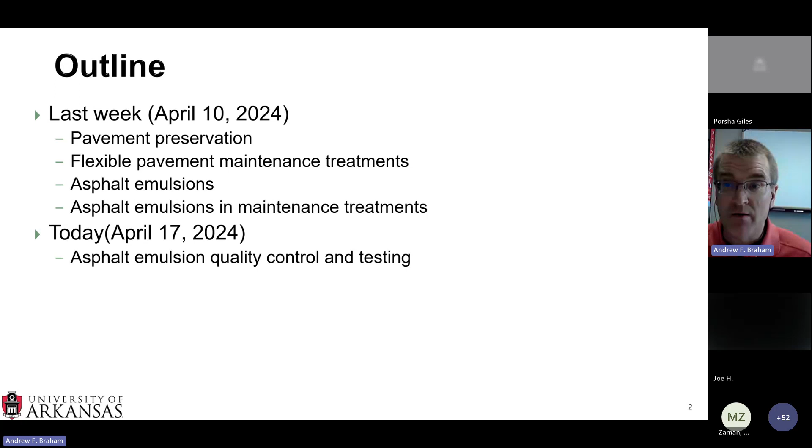Now this week, we're going to pivot a little more toward some of the details behind asphalt emulsions specifically, including quality control and testing of asphalt emulsions, specification best practices for asphalt emulsion maintenance treatments, and finally inspecting construction of asphalt emulsion treatments.

I often say that we can have the best materials in the world, we can have the best design in the world, but if we don't construct it correctly, if we don't make sure we have high quality materials, if we don't follow best practices, and if we don't inspect the construction correctly, all of the work we did up to that point is essentially irrelevant, and you will not get the full benefit of what you are trying to do on the roadway.

So today we're going to go over those three areas. Let's continue with asphalt emulsions in flexible pavement preservation.

Just a little bit of a recap. I wanted to make sure everyone's on the same page of Asphalt Emulsions 101, and specifically the nomenclature, or how asphalt emulsions are named, because we're going to go over a lot of examples and details where this nomenclature is important today.

For setting speed, there are 4 different setting speeds. We have the rapid set, quick set, medium set, and slow set, designated by R, Q, M, and S. There are also 3 different particle charges.

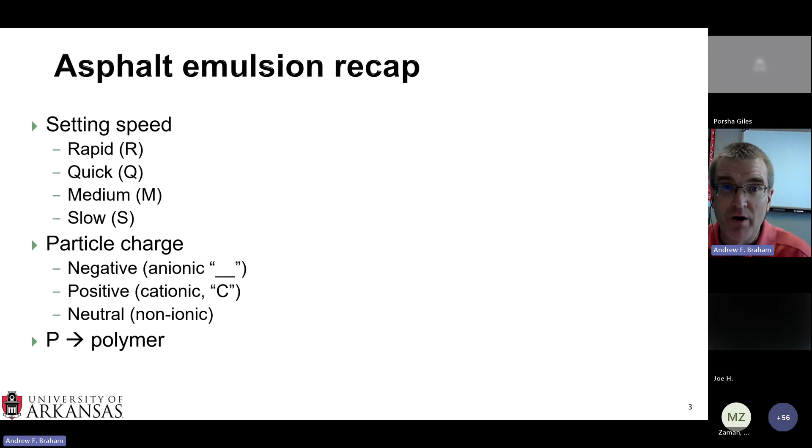Another very important letter is a capital P, which is polymer. I went over this in more detail last week, and Olivia posted the recording of part 1 of the workshop in the chat box, so I encourage you to take a look at that. Preferably not while I'm talking now, but if you want a quick recap, you could put that on double speed and try to catch up. But the link is there for you to watch at your leisure.

Now, what I wanted to do, and why I went over these definitions again, is—oh, I'm sorry, my screen stopped sharing for some reason. There we go.

The reason I wanted to go over these definitions quickly is because I want to spend some time talking about standards, specifically the 3 different types of standards that revolve around asphalt emulsions, including AASHTO M316, which covers polymer modified asphalt emulsions, with 11 different grades of asphalt emulsions within that specification.

Olivia, I apologize, my sharing ability is going on and off quite frequently. Am I doing something wrong on my end? Katie, could you see what is going on? I'll see what I can do. Okay, thank you, thank you.

So if we take a look at AASHTO M316, that is polymer modified asphalt emulsions, and there are 11 grades of asphalt emulsion covered under AASHTO M316. If you take a look at AASHTO M208, those are all the cationic asphalt emulsions, with 12 different grades covered under that standard. You may wonder why I'm going in reverse order—we started at M316, went to M208, and the last one I wanted to highlight was AASHTO M140.

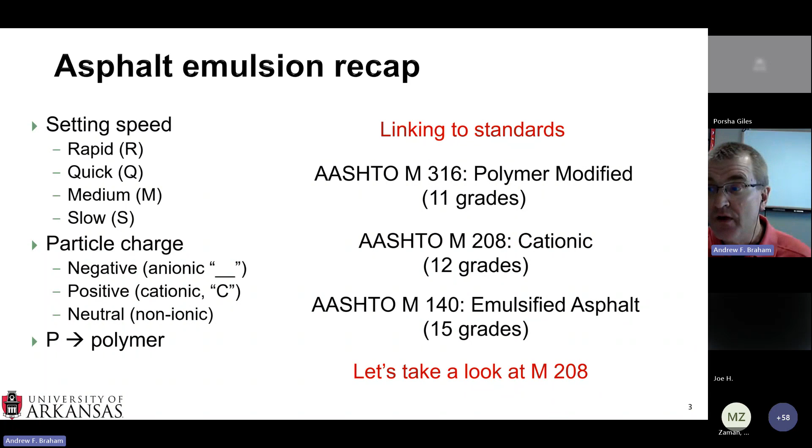Now, just so you know what you're getting into, we're going to take a quick look at M208. A big part of both 208, 316, and 140 are these massive tables, and along the left-hand column of these tables, you have the different tests that you can run on asphalt emulsions.

So you have a couple different viscosity tests—both Saybolt Furol and rotational paddle viscosity. You have a storage stability test, a particle charge test, a sieve test, and for AASHTO M208, a cement mixing test. Then we have what's called distillation, where you take your asphalt emulsion, and historically you get an asphalt emulsion residue out of it.

Sorry, Andrew. Katie, could you mute other people because I can hear background noise. Thank you.

So this top half of tests are tests on the emulsified asphalt, but then you need to get what's called asphalt emulsion residue. The traditional method of obtaining that asphalt emulsion residue is through the distillation test. You get your residue in a percent, and then you also get something called oil distillation, which are lighter fractions of your asphalt binder that come off the top.

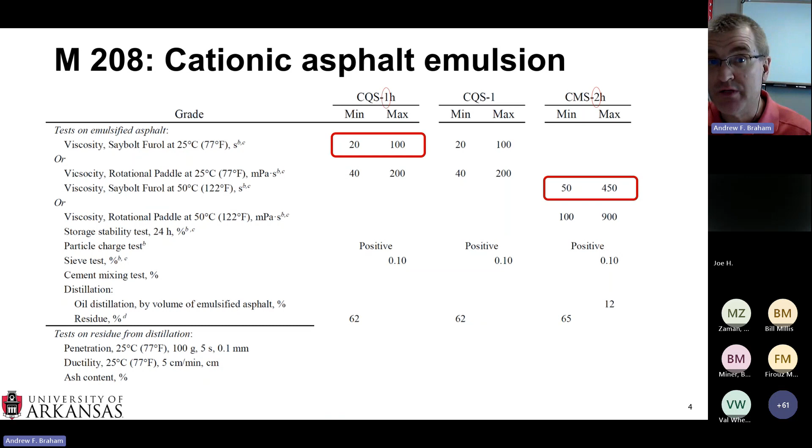Then you've got some distillation. That CMS-2H has a 12% maximum oil distillation, but you can see the residues vary between these different emulsions. The CQSs both have a 62% residue. That means it's 62% asphalt binder, and then that would mean 38% liquids that evaporate off during the distillation test. And then the CMS is a 65% residue.

Then getting down on the tests on the residue, we've got our standard friend, the penetration test. You can see that CQS-1 does not have any letter after the 1, but the CMS-2H has the H, and the penetration result is what causes the differentiation between having an H and not having an H. Not having that H means the penetration's between 90 and 250—that's a little softer, the needle goes down into the asphalt emulsion residue a little more. And then the 2H, that's a hard pen asphalt binder, that's between 40 and 90.

So this is just, again, an example. As I mentioned, there are 12 total cationic grades, 11 polymer modified, and 15 emulsified asphalts. So there's a whole bunch of these different ones, but this is how you actually take a sample of asphalt emulsion and make sure it's passing and has the properties you're interested in it having.

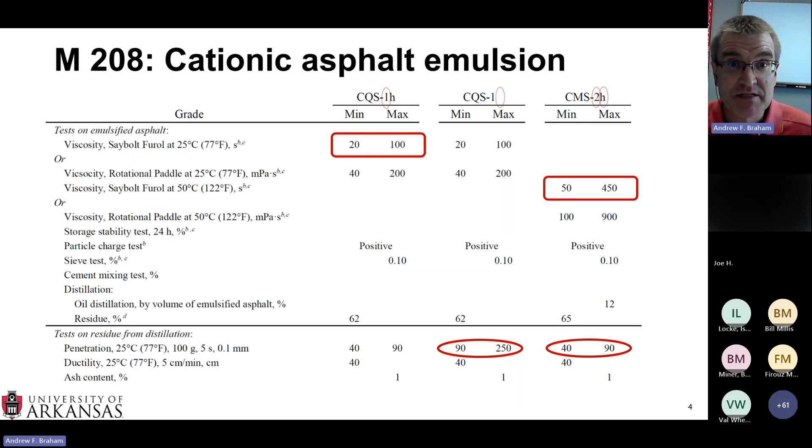Now, I went over this table relatively quickly. If you have access to AASHTO standards, I recommend you take a look at these tables. They're very interesting to look at, there's a lot of nice details behind there. But I did want to go over some of the tests, and some of the tests are shown in AASHTO T59.

So when we're looking at grading asphalt emulsions, we have M140, M208, and M316. But when we're looking at the actual tests that can be run, we're going to pivot to AASHTO T59. These are emulsified asphalt tests, and we're going to start with looking at the tests that are run on the asphalt emulsion.

They are broken down into various different categories. For example, they're broken down into the composition of the asphalt emulsion. You have water content, you have the residue and oil distillate, which is shown on the right. You have the residue by evaporation, and you have the particle charge. So in AASHTO T59, these are all considered composition properties of asphalt emulsion.

Now, another way to look at it is through consistency. So what are some tests that we can run to measure the consistency of asphalt emulsion? We're going to look at two different viscosity tests, the Saybolt and the paddle viscometer.

Now, I apologize in advance. I'm a civil engineer, I'm not an artist. All my artwork is done in Excel. So I'm going to try and demonstrate the Saybolt test, and you guys can judge as to whether or not you think you get the point across.

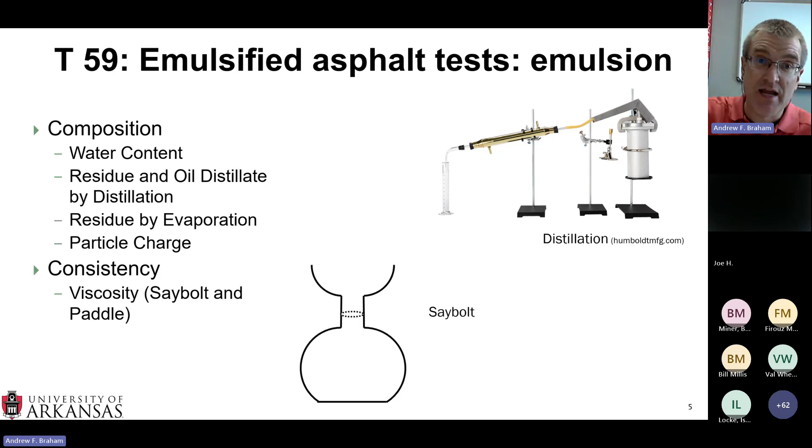But the whole point of the Saybolt test is you have some sort of container in a bath at a certain temperature that has a very specific hole at the bottom, and it's a Saybolt orifice. That's how the test gets its name. You take a cork out, and then the emulsion starts pouring into this little cup. So you take the cork out, you start your watch, asphalt emulsion falls down. You want to make sure it hits the side of that cup so it doesn't get really turbulent.

As it falls down, it starts filling the cup. And what you do is you measure the time from when you pull that cork out to when the asphalt emulsion reaches that dotted line. So how long does it take to fill that cup? And if you remember from the previous slide, the Saybolt viscosity is measured in seconds. So it's a time.

Now, the Saybolt viscosity is a relatively old test. We don't run a Brookfield rotational viscometer because, in theory, if you run the Brookfield rotational viscometer, it needs to be a homogeneous material, and asphalt emulsion, by definition, is not homogeneous. So we can also run the paddle viscometer, which is essentially where you have a cup, you place a paddle in, and then you start rotating the paddle, and you measure the resistance.

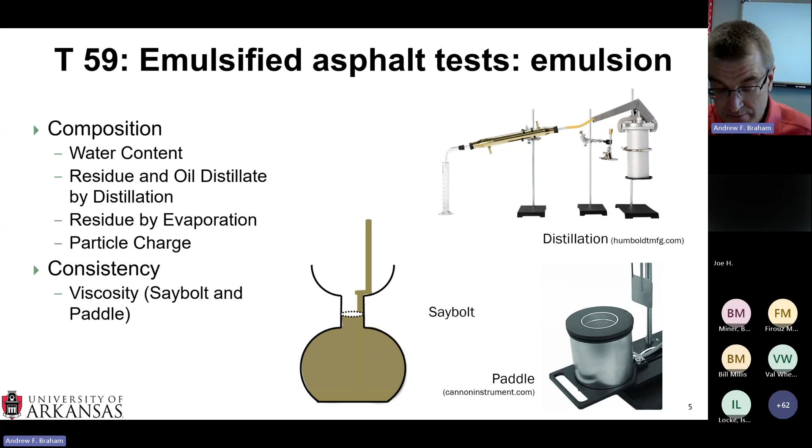So these are the first sets of tests on asphalt emulsion in T59. That includes composition and consistency. We can continue going through T59, and the next category is stability.

If you remember from the previous presentation, asphalt emulsion is asphalt binder droplets suspended in water with the help of emulsifiers, but over time asphalt emulsion flocculates, which means the particles start to come together, but you can separate them. It starts to coalesce, which means those droplets start sticking together and you can't separate them. And then the water eventually leaves the system, and that's a full break.

We're very interested in making sure that we can store the asphalt emulsions in a tank for a period of time before shipping them to the job site, so they need to be stable. One test is a demulsibility test, which is essentially where you drop some chemical into your emulsion and you stir it and you see how long it takes for the asphalt emulsion to start coalescing. How long does it take for those binder droplets to start joining together and your asphalt emulsion breaks?

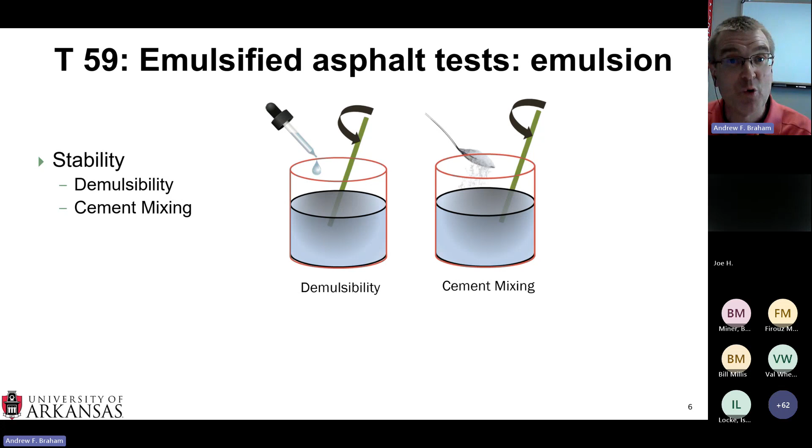So the demulsibility is a relatively newer test, but the old school way of doing this test is just to simply dump some cement in there. So you have a little bit of reactivity from the surface chemistry of the cement. You also have a very high surface area of the cement particles. So this is another way you can quantify the breaking characteristics of your asphalt emulsion, and you can measure how stable your asphalt emulsion is.

Now, I had mentioned the sieve test. You literally take your asphalt emulsion and you pour it through a screen. And you rinse that screen and you measure how many particles have been retained on that screen. These are very large particles. If you recall, 0.1% is the maximum for the sieve test, and that's because these are very oversized particles.

And these are not good for asphalt emulsions. They cause problems with pumping. They cause problems with spraying for chip seals or fog seals or scrub seals. And then they also cause problems for good mixing when you're doing slurry seals, microsurfacing, cold in place recycling, full depth reclamation, hot in place recycling, any sort of mixture test. So you want to have a low amount of sieve.

Then we also have the storage stability test. Essentially, you put your asphalt emulsion in a big graduated cylinder and let it sit. Over a 24-hour period, you measure how much of the asphalt binder droplets have sunk to the bottom, and how much of the water has risen to the top. The heavier particles drop due to gravity, while the lighter particles are more suspended at the top, so you can actually see a gradient of colors.

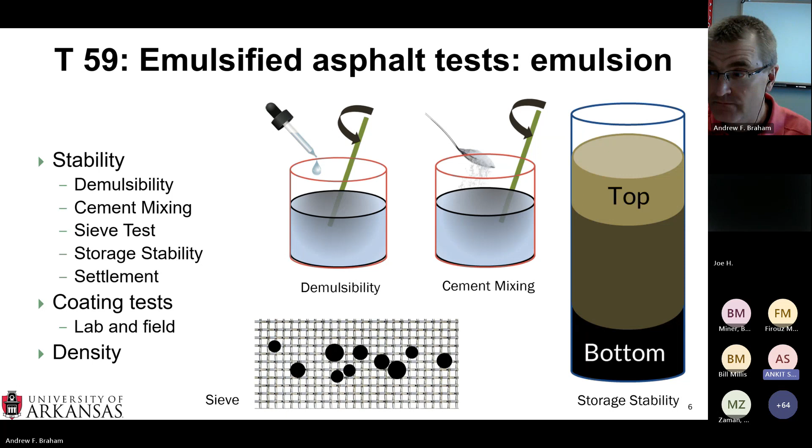For example, here in the state of Arkansas, in the southern United States, we use PG 64 minus 22 quite a bit. You go up to Wisconsin, which is where I'm originally from, and I love Wisconsin, they use a lot of PG 58 minus 28, which is a much softer binder. So the idea is, whether you're in Wisconsin or Arkansas, it doesn't matter what the base binder is. Your job, when making emulsions, is if you want to make a CQS-1H, you need to put the proper ingredients together to hit all those numbers. If you want to make a CMS2H, you might need to tweak this or that.

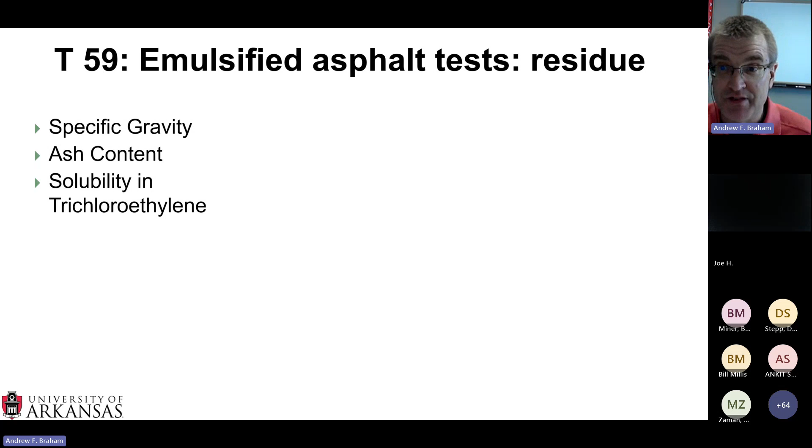So we spent a little time on AASHTO T59 talking about the asphalt emulsion tests. Now AASHTO T59 also has some tests for the residue, the asphalt emulsion residue. So we have specific gravity, ash content, which is how much non-combustible material is in your asphalt emulsion residue, and we have solubility as a test.

Then we have the classic penetration test, and I always like talking about this test for two reasons. One, it's probably the most historic asphalt binder test we have in our toolbox. Two, this is literally a sewing needle used in the penetration test. The gentleman who created it was looking for something to poke into an asphalt binder sample, so he went to his wife's sewing kit, took a sewing needle out, put a 100-gram weight on it, and measured how long it takes for that sewing needle to sink into the asphalt binder sample, how far it sinks in 5 seconds with that 100-gram weight on it. So it's a classic test.

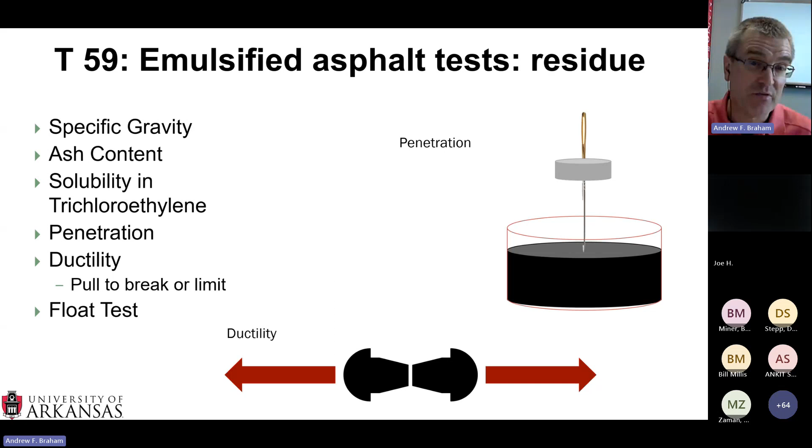Now we also have ductility. Ductility is where you take your sample and start pulling it apart until it breaks, or you reach the limit of the test. That's the ductility, basically how stretchy the asphalt emulsion residue is. And then the float test. The float test has to do with high float asphalt emulsions, which are a very special category. Again, it doesn't matter how you make it, but if you run the float test on the asphalt emulsion and it passes, then you have a high float asphalt emulsion.

Now these are all AASHTO T59. When we're talking about specifications, a lot of state and local specifications do have a lot of the AASHTO T59 tests in their specification. But I wanted to give a call out to some more tests that are out there and available.

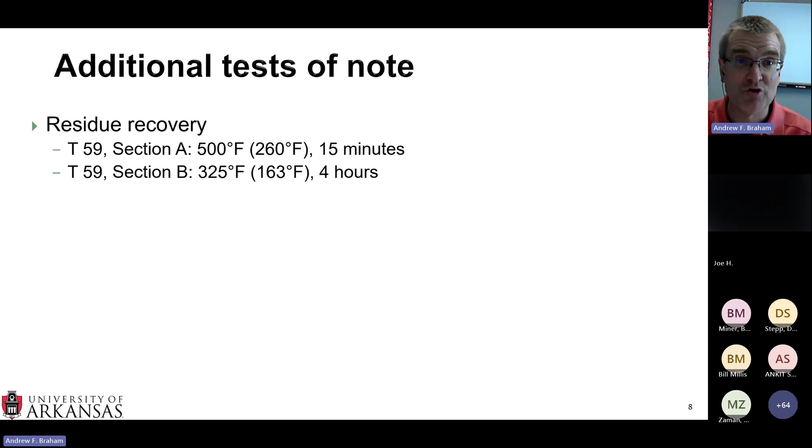For example, the residue recovery. When you're running the distillation test, that's the classic test to get asphalt emulsion residue, at about 500 degrees Fahrenheit, which is an extremely high temperature not seen in the field and not representative of how asphalt emulsion loses its water, how it breaks and loses water in the field. So we have AASHTO T59, which includes different alternative residue recovery methods with slightly lower temperatures, so you don't heat your asphalt emulsion residue up as high as is necessary for the distillation test. We have section A and section B, with lower temperatures and longer times to get your residue, so there are pros and cons to that.

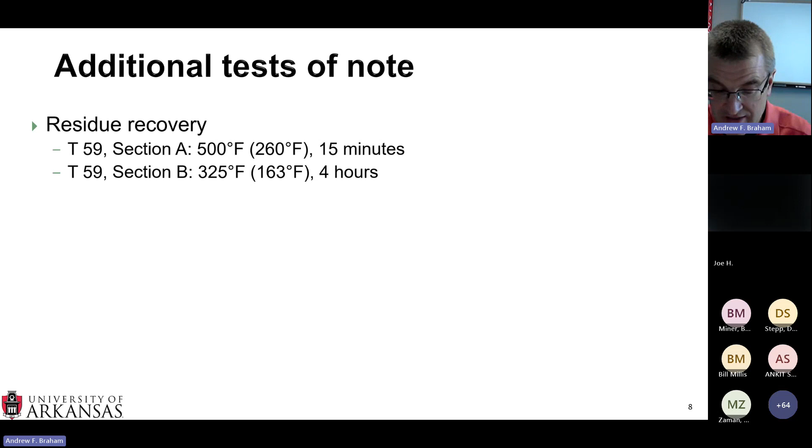Then in R78, we again have procedure A and B, and these are even lower temperatures. So the default distillation temperature, AASHTO T59 section A, is 500 degrees Fahrenheit and only takes 15 minutes, which is fantastic. But these more ambient, more representative temperatures you see in the field, AASHTO R78 procedure A and B, take much longer: 24 hours at 77 degrees Fahrenheit plus 24 hours at 140 degrees Fahrenheit, or just 6 hours at 140 degrees Fahrenheit at a thinner layer.

If you're interested in this residue recovery, Mike Anderson at the Asphalt Institute has been doing a fantastic job in NCHRP 9-63. He's building on work done by Dr. Amy Epps Martin at Texas A&M and Dr. Richard Kim at NC State, who've done a lot of work in this area. I encourage you to take a look at NCHRP 9-63, and hopefully we'll be getting some of those final reports in the upcoming months.

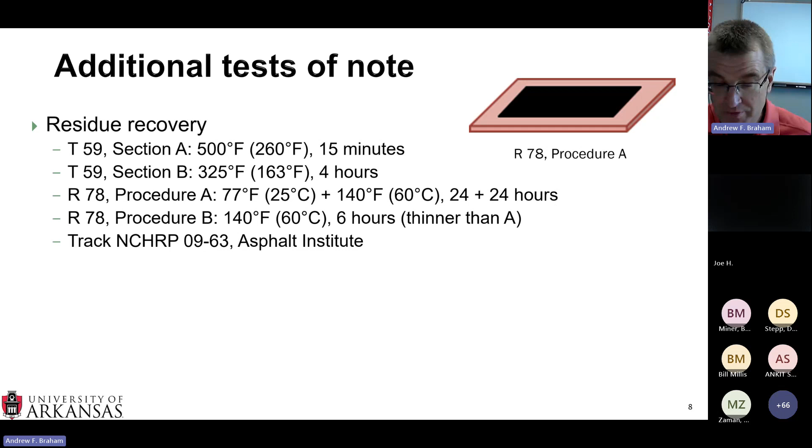We also have elastic recovery. So if you remember, ductility is where you pull your sample and it either breaks or it pulls to the limit. Elastic recovery is where you pull to a certain limit, then cut it, and see how much the sample rebounds. This is very important when we're talking about polymer, because polymer has that rebounding action. There are other additives that can simulate polymer in a lot of ways, but they will not be able to pass the elastic recovery test.

So AASHTO M316 explicitly states elastic recovery to ensure that you're putting polymer in. This can be an SBS modified asphalt binder base, or it can be a latex modified asphalt emulsion. The softening point is also included in this test. These are some additional tests that are in the different AASHTO M140, M208, and M316. I think there'll be a lot of information about this residue recovery coming up in the upcoming year, because that's a point of very large interest.

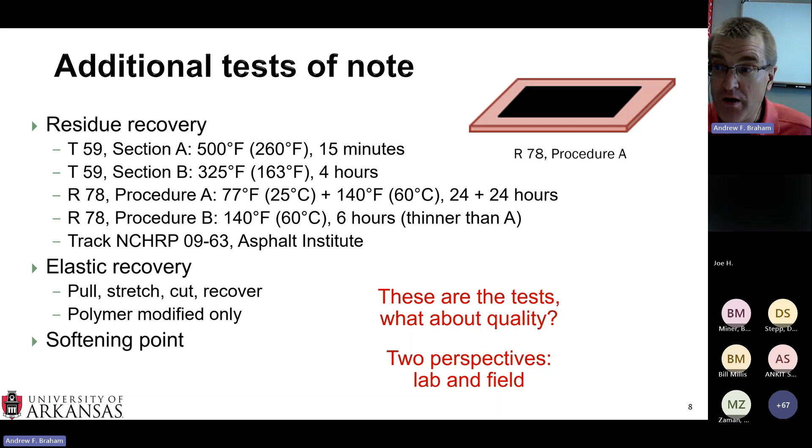So these are the tests, and the title of this section was Quality Control and Testing. We went over the tests. Now, how do we start trying to wrap our heads around quality control? This is something I've actually gotten very interested in over the past 5 to 7 years. I think that the concept of quality is not quite as appreciated as much as it could be. So we're going to look at 2 perspectives for quality: the lab perspective and then a field perspective.

So the lab perspective of quality is everything AASHTO R18. AASHTO R18 essentially helps you build a quality management system, and they start you right at step 1. They have 8 management areas, and this includes making sure you're tracking documents, mapping out your organization, establishing the proper staff. You really should have a quality manager, someone who is in charge of the quality perspective. It goes over what sort of technicians you need and how you train those technicians.

And then how do you evaluate it? Because when you think about it, you've got different people running these tests, and Dr. Zaman asked how repeatable they are. Well, if the technicians have proper training and are properly evaluated, in theory, anyone running that test should be able to get a high quality, repeatable result. But like any test, if you're not running it correctly, you're going to get some poor results. It's important to have internal audits—a way to self-reflect and make sure you're doing everything correctly.

I really like this. It's not often that you get to pick on management, but there's a lot that needs to be done in the weeds on the tests at that level. But also you need to make sure management is 100% involved with this as well, because it does take extra resources—a little time, a little money—but if you're pushing out a consistent product, it becomes well worth it. You need to make sure there are mechanisms in place for any sort of corrective actions.

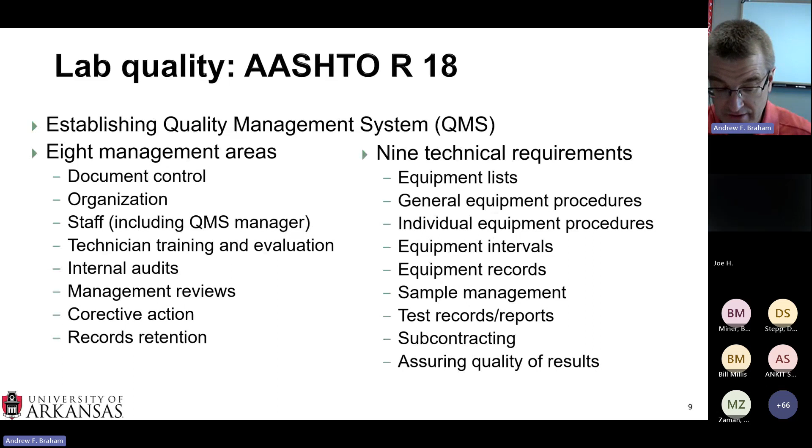So that's all in the lab, and now we can kind of pivot over to the field. When we're thinking about field quality, we're just going to look at an example of an asphalt emulsion. I'm going to have 3 columns here: the first column is the process control test - what kind of tests can you actually run in order to quantify the quality of emulsion in the field?

We're going to talk about specific test measures that can capture that process, and then we're going to talk about the frequency.

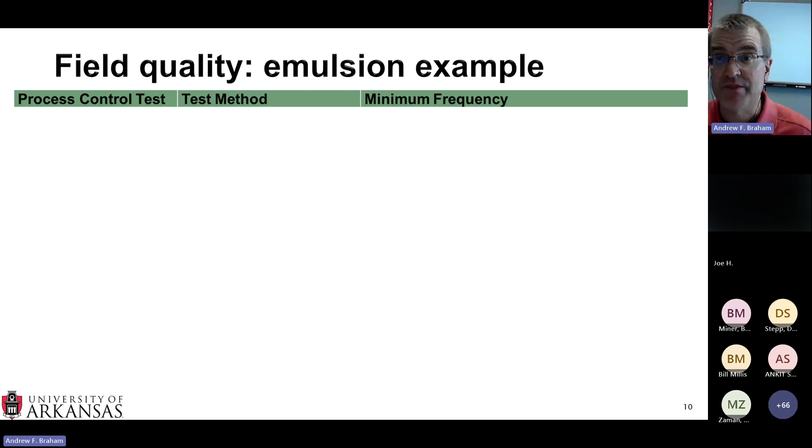For example, viscosity - you can use either AASHTO T59 or T382. T382 is the paddle viscometer. According to this example, you want to run viscosity once per every 48,000 gallons of emulsion placed. If you're looking at a half gallon per square yard or something like that, that's about 100,000 square yards. So every 100,000 square yards of coverage, if this is a chip seal, you would run a viscosity test.

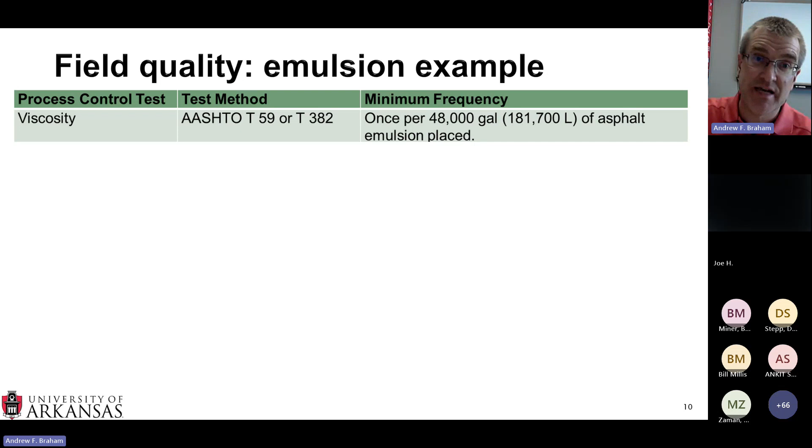And that allows you to test material as you're placing it on a regular basis as you go down the road.

You want to make sure that your emulsion's at the right temperature, and so every time a new tanker comes with a new batch of asphalt emulsion, you want to check that temperature. You want to check particle charge and demulsibility. For particle charge, it's recommended to check it once prior to loading the emulsion distributor, and for demulsibility, it's the same as viscosity, once per 48,000 gallons.

All three of these - sieve, storage stability, and residue - these are also once every 48,000 gallons. And then the application rate: this is what's actually being placed down in the field. You want to make sure that you're properly capturing how much material is actually being placed on the roadway, once at startup each production day, and then every 48,000 gallons.

So these are from one of the quality assurance documents that the AASHTO Emulsion Task Force has developed. This is just one example of a group of experts who came together and said, these are the important tests that we need to run to make sure the material we're placing in the field is representative, and this is how often we think they should be run. These are interesting numbers because they actually put some data behind how you can track to make sure your emulsion is doing what it needs to do in the field.

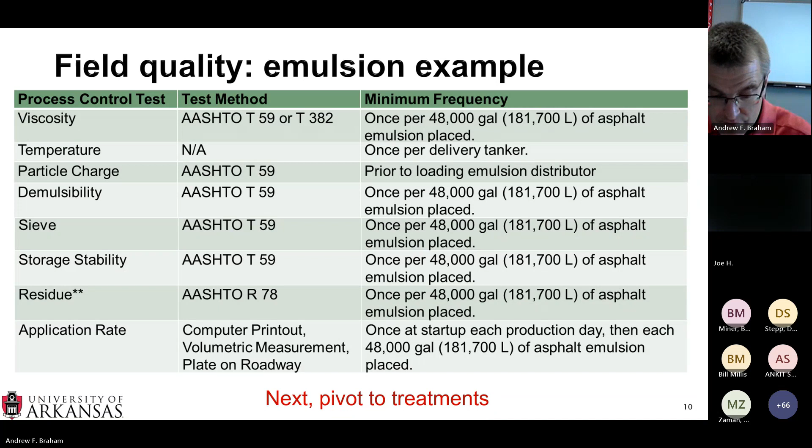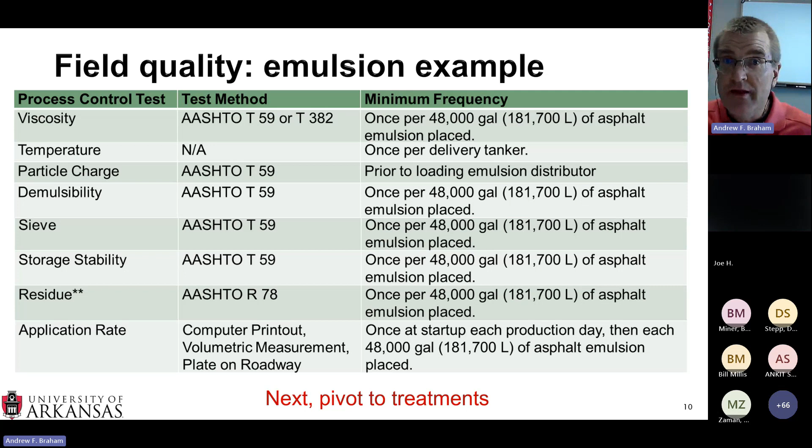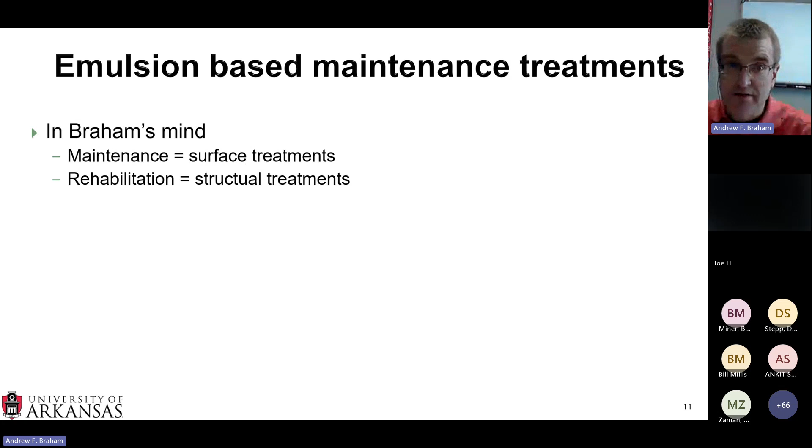If you joined us last week, this is kind of my mindset. I'm a little unique in many ways, but when I think about maintenance treatments for flexible pavements, I think of just taking care of the surface. When I think about rehabilitation treatments, I think about taking care of the structure. So this is kind of how I delineate maintenance versus rehabilitation for flexible pavements in my mind.

Some of the maintenance treatments: we've got fog seal, both standard fog seals and rejuvenated fog seals. We have chip seals, sand seals, and scrub seals. These all involve placing some sort of aggregate on top of sprayed asphalt emulsion. We have slurry surfacing, which is a combination of slurry seal and microsurfacing. And then we have ultra thin bonded wearing courses, and combination treatments.

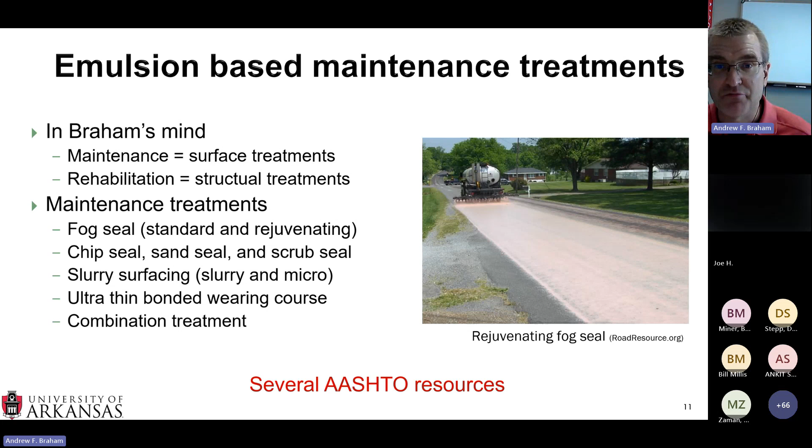Now, there are several AASHTO resources. I don't have this written down, but I want to give a shout out to roadresource.org. If you have not been there, I encourage you to go there. They have a very good overview of all of these treatments, and you can go there free of charge, click on whatever you want and check it out.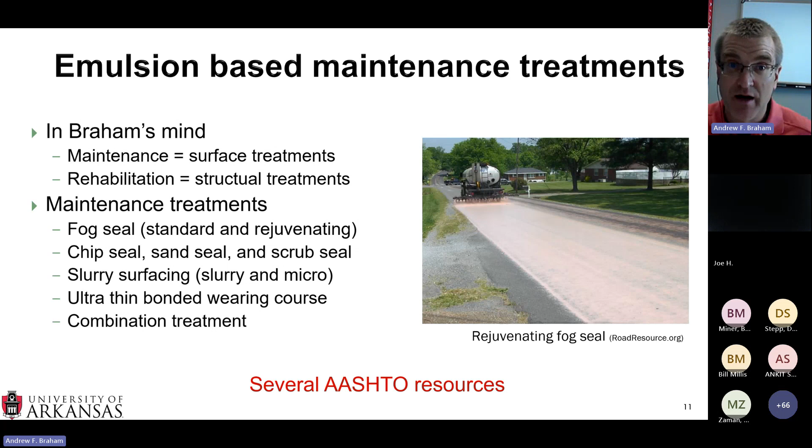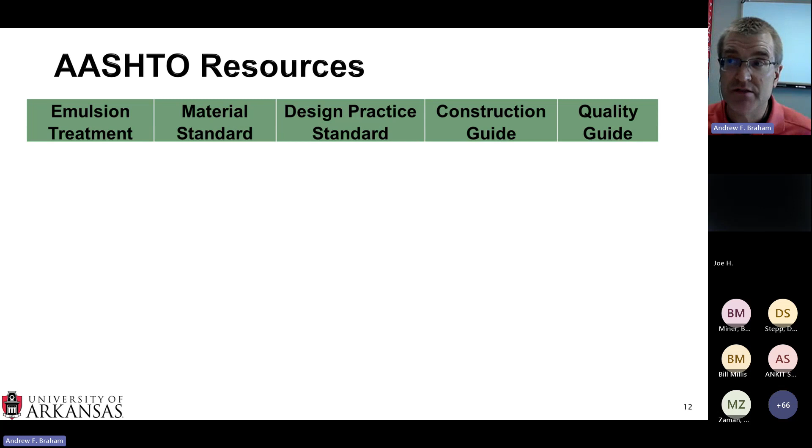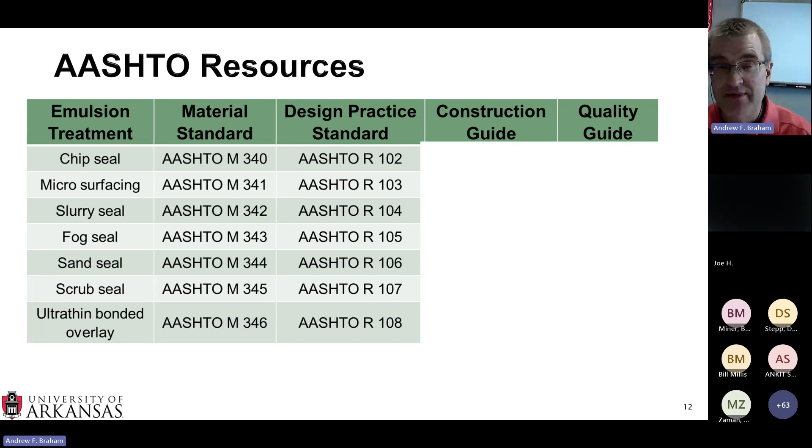But AASHTO has also done a tremendous job of developing resources for these treatments. The AASHTO resources include material standards, design practice standards, construction guides, and quality guides. These have been developed for chip seals, microsurfacing, slurry seals and fog seals, sand seals and scrub seals, and ultra-thin bonded overlays. If you have access to AASHTO standards, these are the actual material standards, going from M340 to M346. The design practice standards go from R102 to R108 for all of these treatments. There is an incredible amount of information in both the material standards and the design practice standards.

And Rama asked if there are free online resources, and good news, there are free online resources for these, which we'll get to in a second.

The construction guides are also being developed. Now, the construction guides themselves are not available free for download, but you can download the research reports that developed them. In theory, all the information that's in the construction guides is in the research report—there's a lot more in there, but the research report has all the information. So if you Google NCHRP 14-37, NCHRP 14-44, or NCHRP 14-48, I think you can download the 37 and 44 final reports, and the 48 final report should be coming out shortly. That project just finished up.

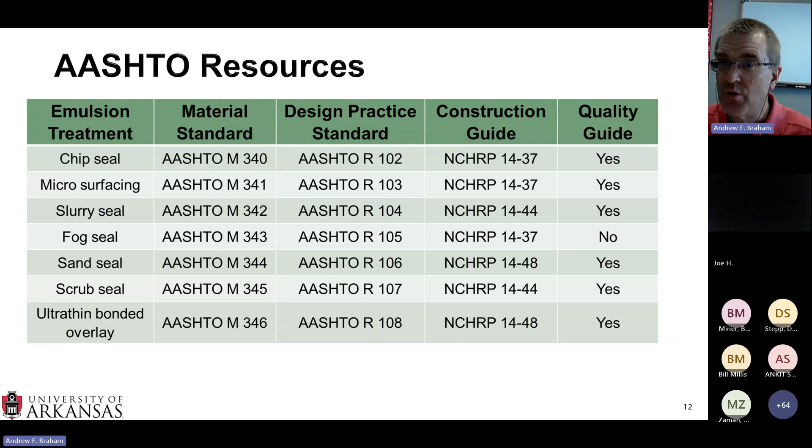And then you can see there are also quality guides for all but the fog seals. As you're Googling, you can also Google Emulsion Task Force. If you go to their webpage and click on specifications, there are draft documents of these available online free of charge.

I'm actually going to go over some of these draft documents, so I apologize in advance because they have watermarks on them, but you can download these and still read them. It's a little clunky, and there are a couple small changes between the draft documents and the final approved standards, but they're all here available for you to take a look at.

So let's take a look at chip seals. Chip seal is by far the most common maintenance treatment that's applied to our roadways.

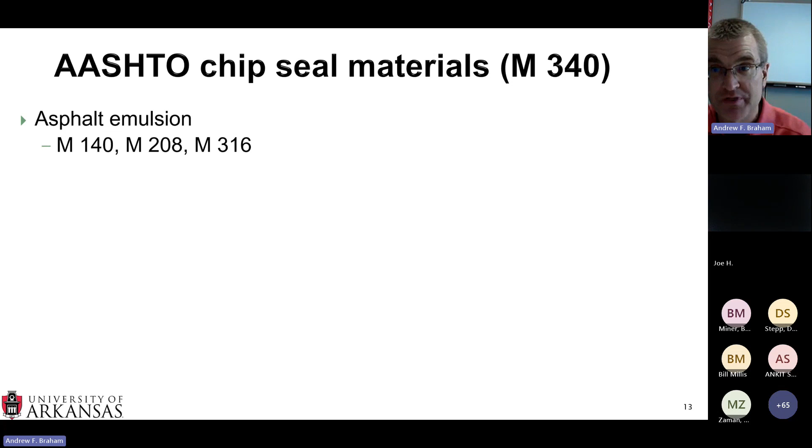If you look at AASHTO M340, there are 3 different asphalt emulsion standards that need to be followed, whether you're using a standard emulsified asphalt, that's M140, a cationic asphalt emulsion, M208, or a polymer modified asphalt emulsion, M316. We have 4 different gradations, labeled A, B, C, and D.

And you can see they have a maximum size of 3/4 inch, 1/2 inch, 3/8 inch, and 2 of them are 3/8 inch. But that D is much smaller than the C, it's a finer gradation. But these are the 4 gradations, and there's 2 things that I would like you to notice on all 4 of these gradations.

One is they're very single sized. So for example, if you look at A, almost all of the aggregate is between 3/8 inch and a 1/2 inch. If you look at B, almost all the aggregates are between the number 4 and a 3/8 inch, and it kind of steps down as you get higher in those letters. So single size aggregate are very important for chip seals.

And also, if you look at the dust, all of the dust is low. Dust is also the P200, and you can see it's between 0 and 1% for all but the D, which is between 0 and 3. So they're very, very clean aggregate gradations.

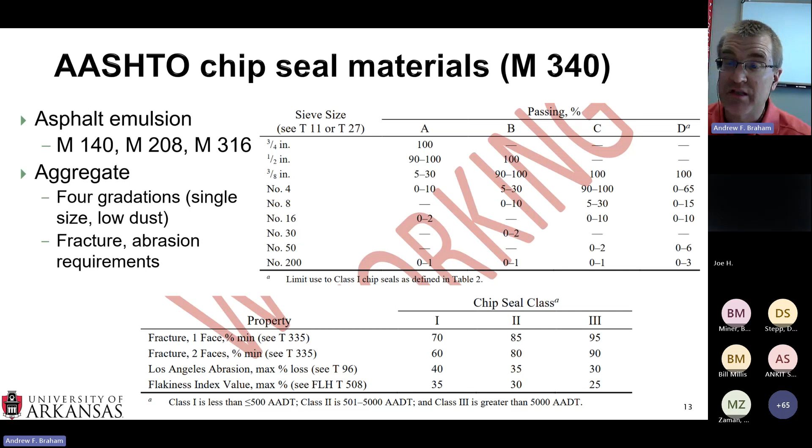And there's also other various aggregate properties: fractured faces, LA abrasion, flakiness index, these type of things. And you can see here they have different classes, and those classes are based on traffic volume. So I mentioned the chip seals are one of the highest used maintenance treatments for flexible pavements, and there's a lot of them that go down on low volume roads, so less than 500 AADT. But then you can see that chip seals can very successfully be placed on higher traffic roads as well, but the requirements change for fractured faces, LA abrasion, and flakiness index.

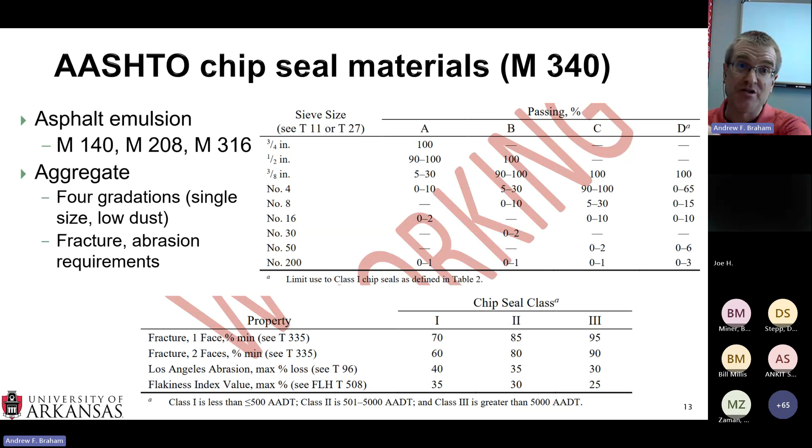Now, again, if you go to the Emulsion Task Force webpage, you can download the full working draft of the standard. I just took some screenshots, which is why that watermark is going across at an angle.

Now, for the design, that's R102. This is pretty exciting. For the aggregate, you use the board test for the spread rate. Basically, as the aggregate comes out of the chip spreader, how is it falling onto the pavement? What's the distribution of particles? What's the quantity of particles? You can simulate that with the board test. And so you run the board test and you get approximately the amount of aggregate that you should put down.

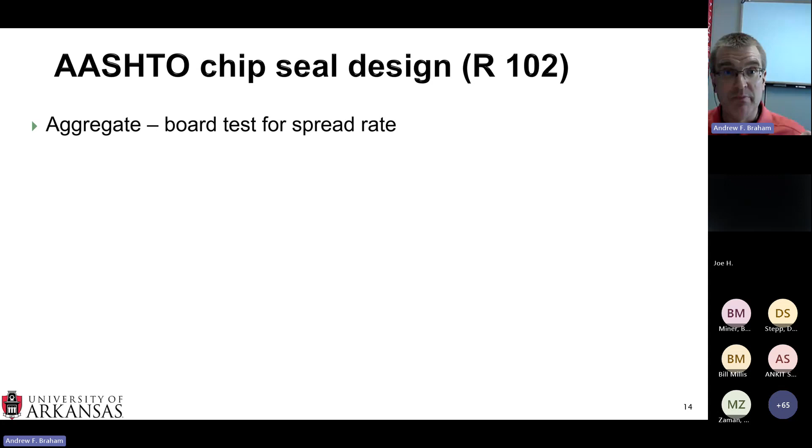And then Dr. Zaman said I wouldn't get paid for this if I didn't show an equation. So here's my equation, and this equation is the emulsified asphalt quantity. So you have your aggregate rate, and then you have your emulsion rate. You can see the emulsion rate is capital A, and the emulsion rate is a function of the embedment rate—so how much of those chips going down into the emulsion, the traffic, the existing surface, all of these different things. And you can see them all listed under that list of variables.

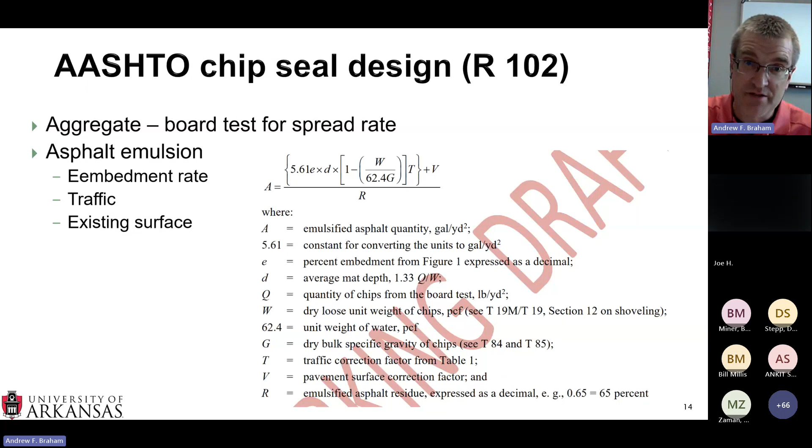And so once you know what your board test spread rate is, that is capital Q, you then find all those other values and you can get an approximate asphalt emulsion spray rate. Now, I do want to point out that there are conversions and adjustments that you can make if you have a very dry pavement, so high oxidation, high raveling, or a very flushed pavement with a lot of asphalt binder at the surface. You can adjust the shot rate a little up or down for chip seals. But this is kind of how you get your general shot rate based on the general aggregate, based on the general embedment that you're looking for, based on the general traffic in your general existing surface.

So that was the materials and the design. This is the construction guide overview. There's 7 sections in all of these construction guides. You have a description, and here you have a very nice description of the AASHTO construction guide overview. Basically, they're saying this is for chip seals, and this is what a chip seal is: application of emulsified asphalt, followed immediately by a single layer of aggregate chips to a prepared surface. So that's the description, and all of the construction guides have that at the beginning.

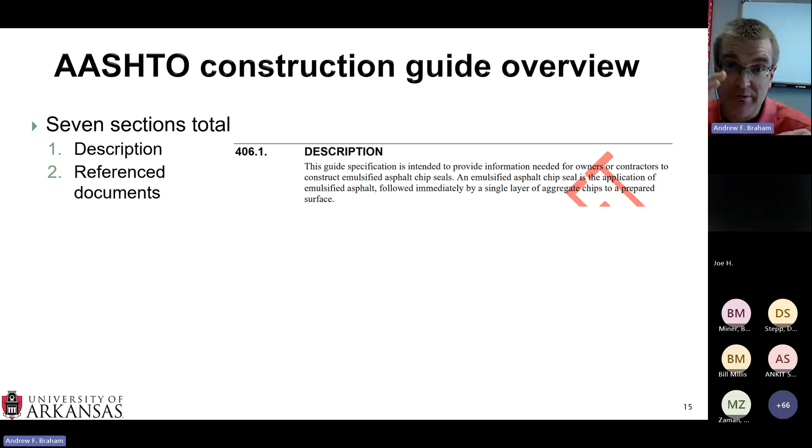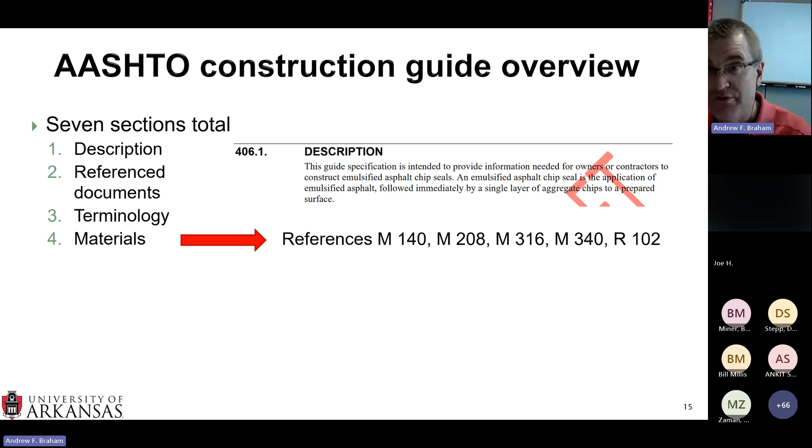Then you have some reference documents—what inside the construction guide actually references an external document. All of those have to be listed, basically the bibliography. You got some terms—if people aren't familiar with some terminology, they do define some terms, that's section 3. And then the materials are listed there. So for chip seals, it references the 3 emulsion standards: M140, M208, M316. And then also M340 and R102, that's the chip seal materials and the chip seal design. So this is all referencing these other resources that are already available.

I'm going to come back to construction. This is the construction guide overview. So that's the most important portion.

Then we have measurement and payment. Basically, this is how do you measure the emulsion and the aggregate, and then how do you pay for it? Usually payments are unit price or completed chip seal.

And a very key section here is construction. This is where the meat of the construction guide occurs.

Now we got a question here about how stress absorbing membrane interlayers are used in each of the surface treatments. Oh, that's a great question. First of all, thank you for asking. So a SAMI, my definition of a SAMI, is something that's put in between two flexible pavement layers.

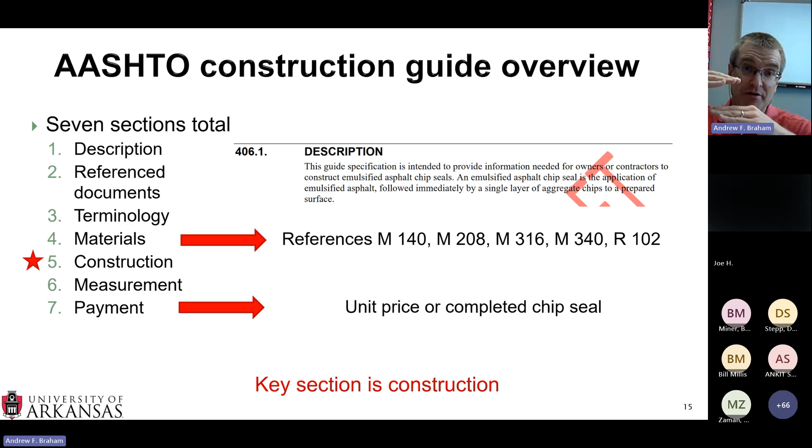In short, if you have a distress on that bottom layer, you don't want that distress to go up through into the top layer that you put on. So a SAMI is an interlayer, something you can put in between.

I usually tend to think that SAMIs are only used when you have two asphalt mixtures, one on top of another. Now, one of the SAMI materials can be a chip seal, but I'm not very familiar with SAMI being applied between an existing layer and a maintenance treatment. That's just my experience. But thank you for the question.

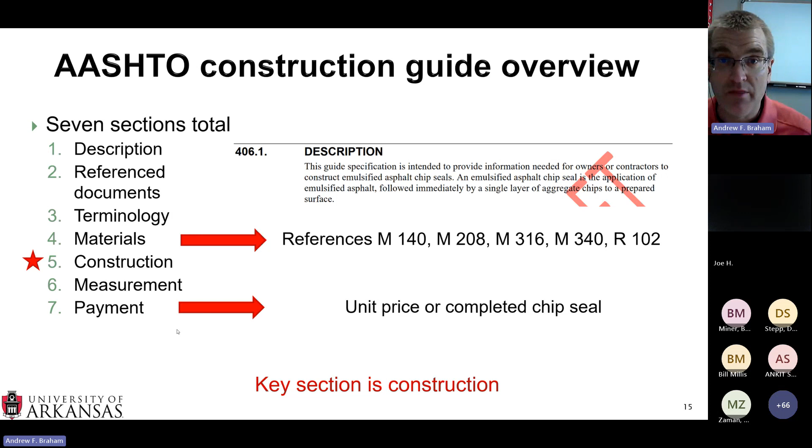I do appreciate that. So that's a little SAMI deviation, but I do want to dig a little into construction. These are the construction guides. By far the most, the meat of this document is in section 5, the construction section.

In section 5, we talk a lot about equipment. When you think about going out on a chip seal job, first of all, if you've never been on one, I highly encourage you to go out on one. Call your DOT. They all have chip seal crews, or they're placing chip seals somewhere, I guarantee you. And I bet they would be very happy to give you a tour of a chip seal job.

And when you get out there, you see an asphalt distributor. That's what sprays the asphalt emulsion. You see an aggregate spreader. That's what places the aggregate in that nice even layer as you're going down the road. You have a pneumatic tire roller.

So you do not compact a chip seal. You seat the aggregates for a chip seal, and you do that using a pneumatic tire roller. Then you have brooms to kick off excess rock. And then obviously you have trucks bringing new emulsion in, trucks bringing rocks in. So you've got a bunch of truck traffic too. All this type of traffic is covered under the equipment section of construction.

Now, I talked quite a bit about quality, right? I talked about quality in the lab and quality in the field. A huge part of quality is also equipment calibration. Folks, this is something that cannot be skipped, either in the lab or in the field.

If you have a piece of equipment, it will give you a number, or it will do something pretty much all the time. If it's not calibrated, though, it will not give you a number that's correct, or it will not perform as you're expecting it to.

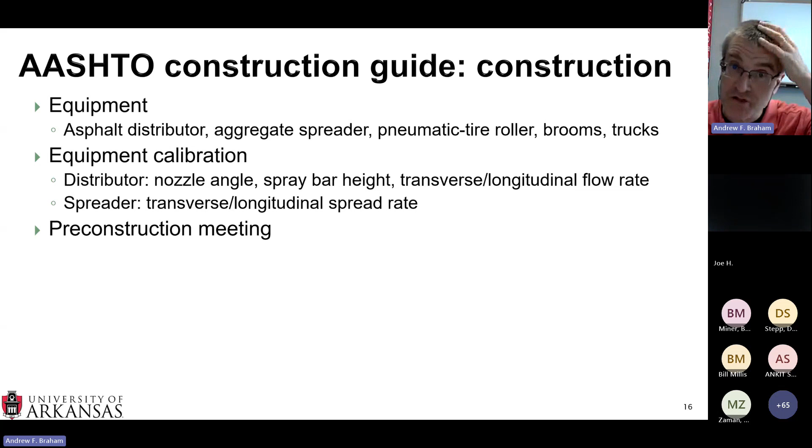Also, any safety considerations are discussed in the pre-construction meeting. And folks, I know I say a lot of things are important - I've probably said that like 15 times in this presentation - but I cannot emphasize enough the importance of properly preparing a road for a surface treatment.

If you don't believe me, the next time you need to put a Band-Aid on, like if you get a cut on your arm, go put some dirt on around the cut and then try to stick that Band-Aid on. The Band-Aid will adhere to the dirt and it'll come right off. It will not stick to your arm.

It's exactly the same thing with any sort of surface treatment. If you have a dirty road surface, your asphalt emulsion will stick to the dirt and come right off. And that's just horrible - you don't want that. So you want to clean the pavement.

You want to protect all the accessories - manhole covers, curbs, crosswalks, whatever you need to do. And you also want to remove stripes, because those thermoplastic stripes - sometimes you don't get good adhesion between emulsion and those type of materials. So you just want to micromill those things off.

And finally, during the application itself, some people think that in the construction guide, during construction, you only care about when you're applying the material. That's just one small part of the construction section of the construction guide. All this other stuff is also important.

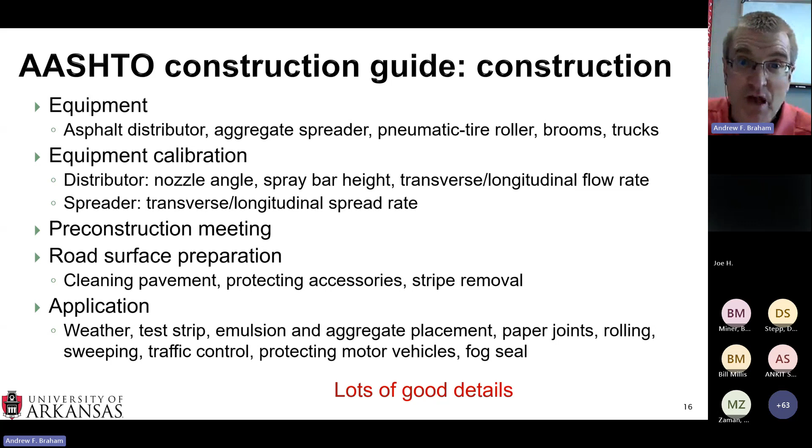The first question is: can we control the properties of an asphalt emulsion? 100%.

Asphalt emulsions are dependent on essentially three things: your base asphalt binder, the emulsifier you're using - that's the chemical - and any sort of water. Usually if you have potable water, you're fine, so you just use city water. But by changing the emulsifier, the quantity of the emulsifier, or the asphalt binder grade, you can change almost anything about any asphalt emulsion. That's a great question.

I encourage you, if you go to some emulsifier companies' websites - I'm not promoting any one single company, but there's four big ones: Nouryon, Ingevity, Arkema, and Kao - you can download product information sheets. So you can say, if you're doing a chip seal, we recommend these emulsifiers; if you're doing a slurry seal, we recommend these emulsifiers. You can match different emulsifiers to different treatments, and some of those websites even have the approximate dosage you can use.

Also, if it's a cationic emulsion, you can change how much acid you have or the type of acid. If it's an anionic emulsion, you can change how much base you have or the type of base - that can also impact it. So I think of it as a bunch of levers you can push and pull to change the asphalt emulsion properties, and you can absolutely make an emulsion that will degrade more quickly if you go into a zone you shouldn't go in. So that's a great question.

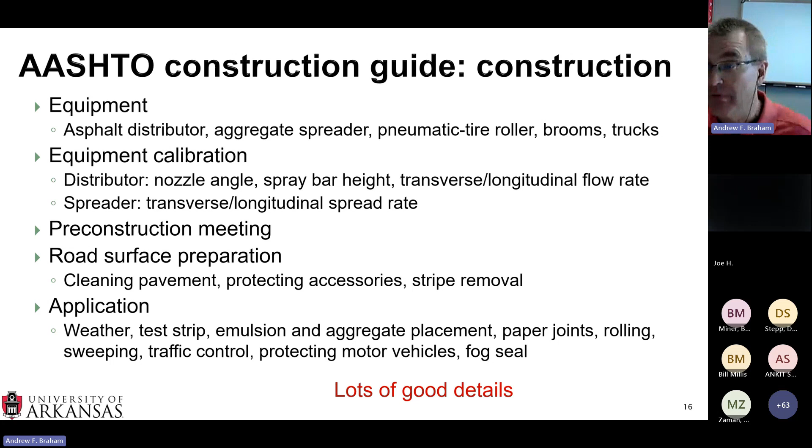We talked about the AASHTO chip seal materials, the chip seal design, the construction guide. Now this is the quality assurance guide. The quality assurance guides follow AASHTO R10 for the definitions, and this includes quality control (QC), agency acceptance, and independent assurance (IA).

For quality control, this usually revolves around what the contractor can do—what sort of personnel, labs and equipment you have, what activities you're performing, do you have a plan for the job, what records and documentation do you have, and are you complying with specifications? So this all kind of falls under the contractor's wheelhouse.

But then the agency or owner needs to accept this material, so they also have a set of tasks. They need to take care of sampling and testing, they may be in charge of traffic control, they want to make sure the surface preparation is being done correctly, that the equipment is calibrated, that you're putting down the right application rate, and you're inspecting the material that's going down. These are all things that have to be done on the owner side.

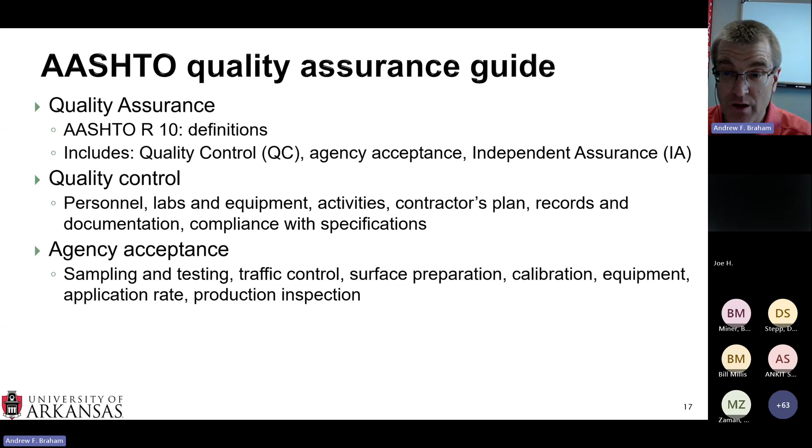So quality control tends to be under the contractor, the agency is the owner, and if they disagree with something, then the independent assurance comes in. This is basically an independent third party that gets triggered if there's an issue between the first two, intended to be an unbiased, independent evaluation.

If you want to learn more about it, I encourage you to download FHWA-HIF-12-001. That is everything you want to know about independent assurance, and there are a lot more good details in there.

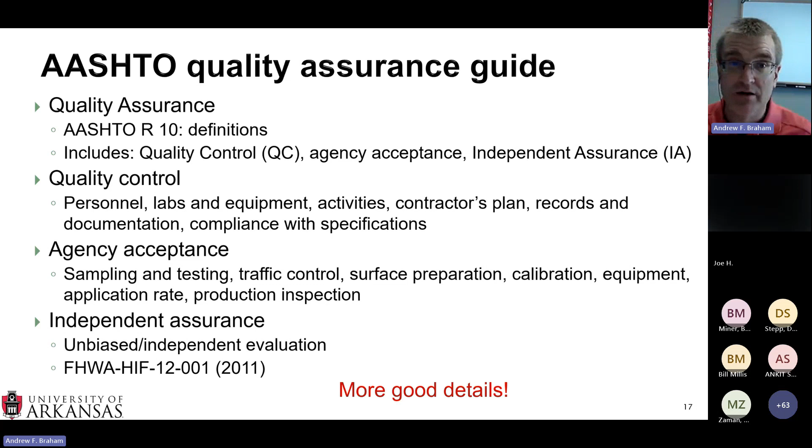Again, you can find draft quality guides on the Emulsion Task Force website. This is kind of the summary of the documents—I encourage you to try and get a hold of these. If you can't, then go to the Emulsion Task Force website, because I only had an hour and a half for this presentation and there are just a lot more things you could look into.

Now, before we get into inspection, the third part of this presentation, we do have a couple different questions. The first question is to discuss the factors between a cold mix asphalt and compare that to hot mix asphalt, specifically around the concept of stability.

It is my opinion that you can design and construct a cold mix asphalt pavement layer that meets the same requirements as a hot mix layer in almost any application. But again, it goes back to the proper materials, the proper design, and the proper construction. Now, my one caveat is surface courses, especially for high volume or fast moving traffic. I'm not 100% sold that cold mix asphalt can be used on, for example, interstate surfaces. I think the traffic may just be too abrasive for that, but there's a lot of lower volume roads out there for slower moving traffic where I think cold mix asphalt, if designed correctly with proper materials and constructed correctly, will have very similar performance to hot mix asphalt.

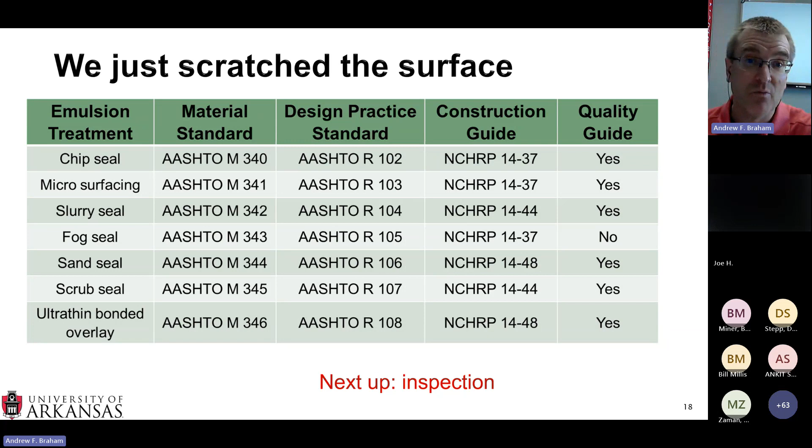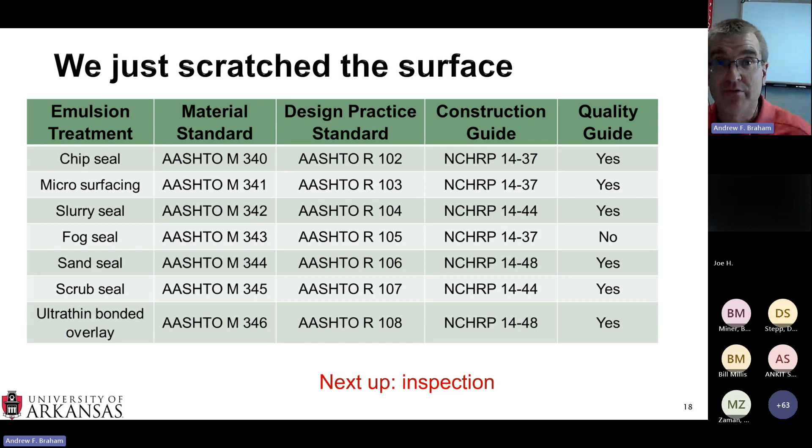Some great questions here, I really appreciate it. We've got 21 minutes left, and I'm glad people are asking questions during the presentation, because no one wants to listen to me talk for 75 minutes straight and then rush through 15 questions. But what I'm going to do is wrap up the rest of my content, because it's one more section, and then I'll finish off with questions for as long as people need.

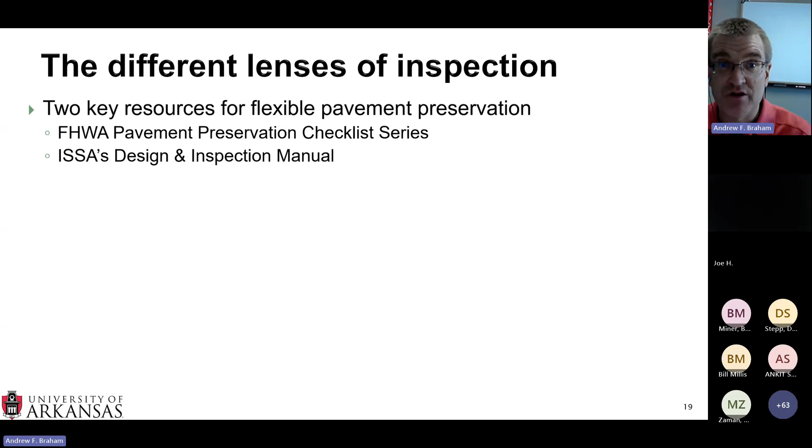When we talk about inspection, there are two different resources. The first is the FHWA Pavement Preservation Checklist Series. These are all free to download online, free of charge, available to anyone. Then there's the ISSA Design and Inspection Manual. If you search 2019 Pavement Preservation Checklists, those are all the flexible pavement treatments available to download for free. The ISSA Design and Inspection Manual for slurry seals and microsurfacing is free if you're an ISSA member. If you're a government agency, you get free ISSA memberships with your .gov email address, so if you work for a government you can get the Design and Inspection Manual free of charge.

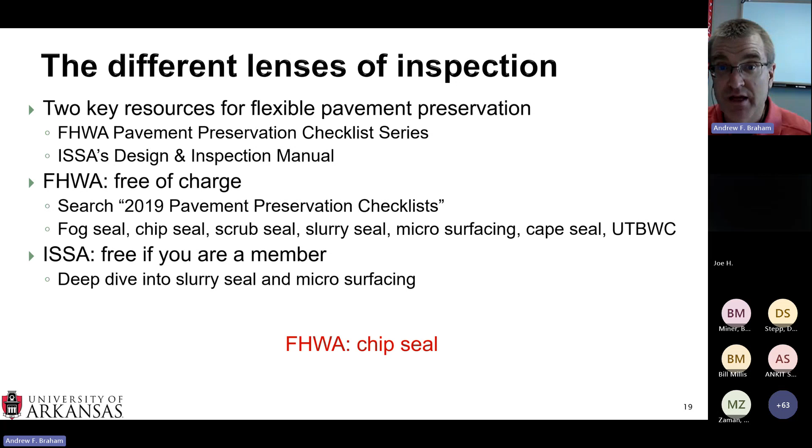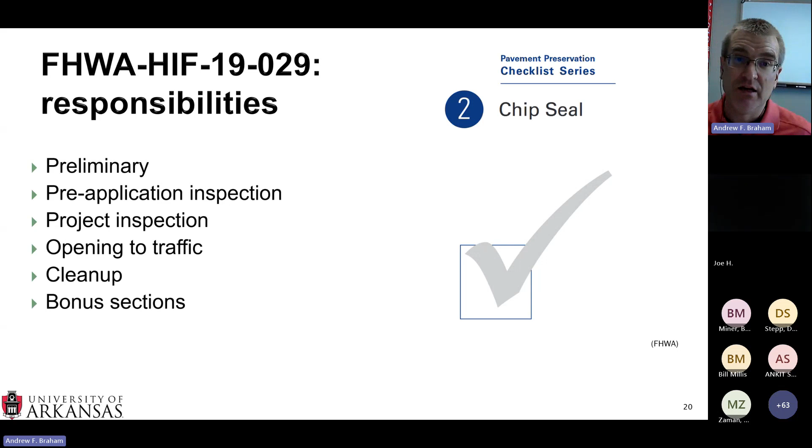What I'm going to do is go over the FHWA checklist, one of the checklists, and I'm going to stick with chip seals since we've been talking about chip seals, to go for it. The FHWA HIF-19-029 is the Pavement Preservation Checklist Series for chip seals, and it has various different sections in it: a preliminary section, the pre-application inspection, project inspection, opening to traffic, cleanup, and then a bonus section. What I'm going to do is very briefly break down each one of these categories.

I don't want to go into too many details because they're all available online. I just want to show you what is available.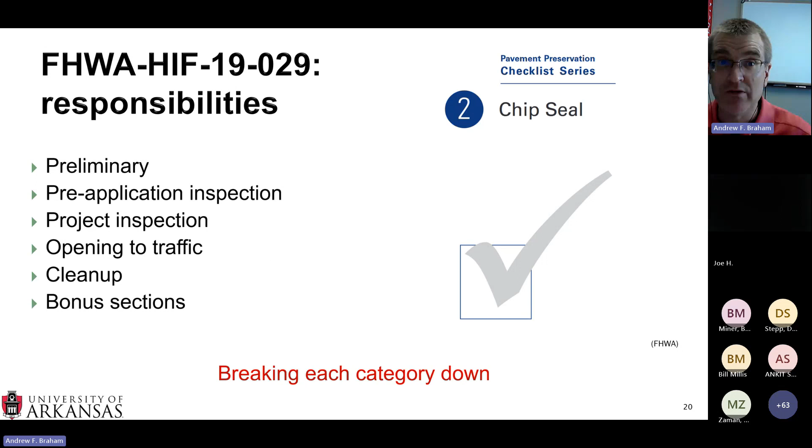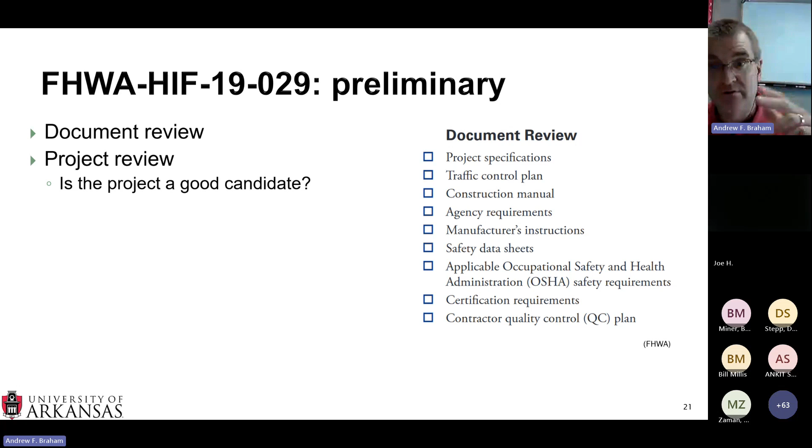For project review, you want to make sure the project's a good candidate. You can have the best materials, the best design, the best construction crew, but if it's the wrong treatment on the wrong road, it's not going to perform like you want it to.

You want to have a materials check. Whether it's emulsion based, asphalt rubber based, or hot applied, you want to make sure you're checking all your materials for those quality tests. And then you want to make sure you have compatibility between your binder and your aggregate. You're using approved suppliers and the proper sampling and testing of properties.

And you can see there the document review. Those are the different documents that they recommend you establish and review before starting your project.

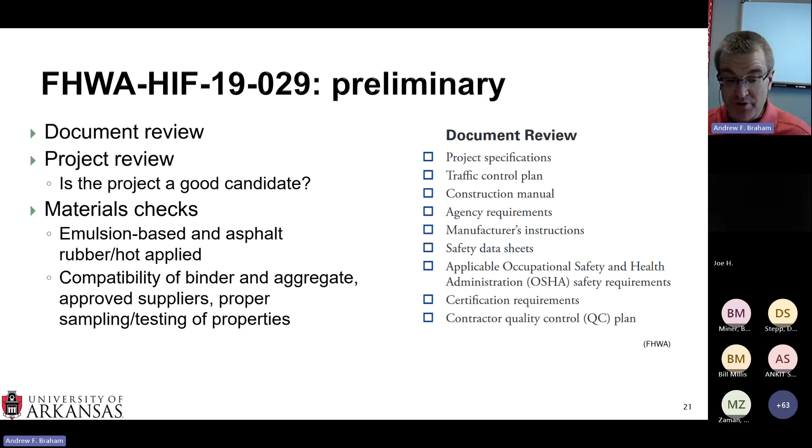Now for the pre-application inspection, a big part of that is pavement surface preparation. You also want to inspect your equipment, including your distributors, chip spreaders, haul trucks, rollers, and sweepers.

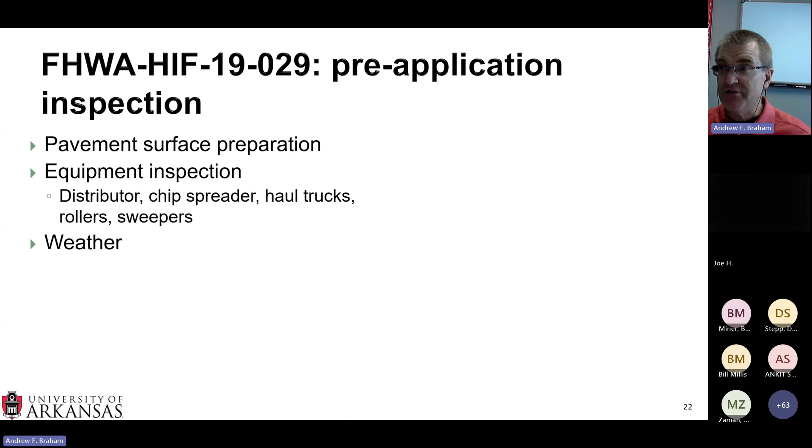Weather is a huge consideration. If we take a look at the weather section of the checklist, there's all those words over there. I could read through all those and probably about half of you would fall asleep by the time I'm done with it. But you need to put it down in daylight.

You want to have proper temperatures. You don't want to have precipitation. You want to beware of high winds, and you need to be cognizant of the humidity level. So when you're thinking about weather, you're thinking about daylight, temperatures, moisture, and wind. Those are the big four things you want to keep your eye out for.

You want to make sure you have designed for the proper application rate, and then as you move down the roadway, you are staying with that proper application rate. There are various ways to measure the application rate - two for asphalt and two for aggregate. If you go to the checklist, they go through all the details of those four total methods. And then they have a traffic control section as well.

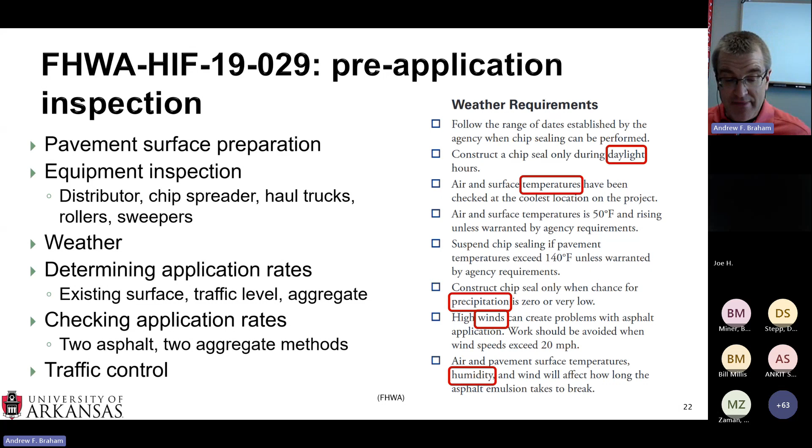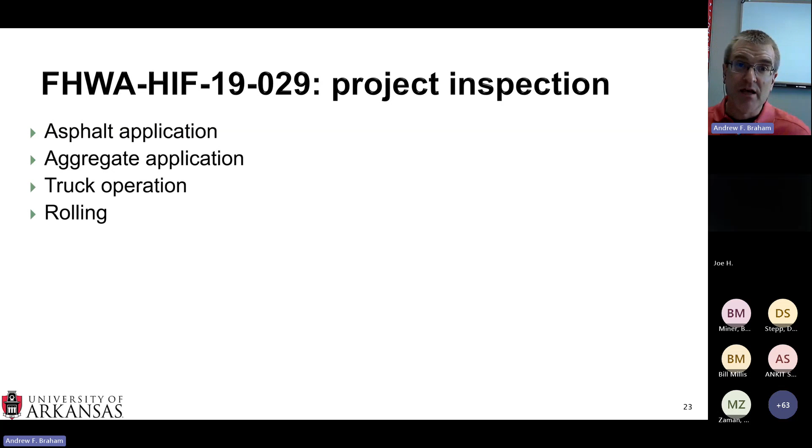When talking about the project inspection, you want to make sure as you're applying the asphalt and the aggregate, they are going down correctly. That includes the trucks operating correctly, and the correct rolling applications.

Longitudinal joints are a very big deal. There are two different methods for longitudinal joints. You can overspray a little bit of emulsion or hot applied on the side, and then when you do the next lane, you cover that up. Or you can take your end nozzle and turn it 90 degrees, so it sprays at a 90-degree angle instead of that 30-degree angle which makes material go off to the side. So you kind of turn it to get a line.

You've got both longitudinal joints and transverse joints that you have to worry about. For transverse joints, especially for construction joints, you usually lay down some felt paper and start spraying on that felt paper. When you lift that felt paper up, you have a real nice clean transverse joint. And then you have to worry about sweeping as well.

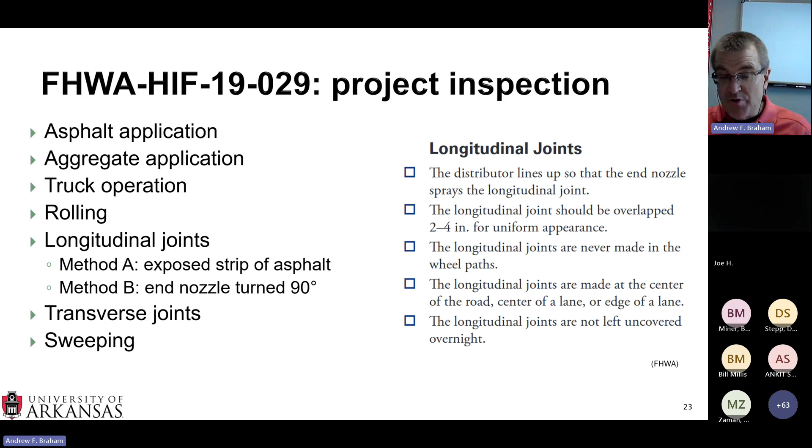Now we're opening to traffic. You can use pilot vehicles. If it's a low enough volume road, you can just post signs and have a 25-mile-per-hour speed limit until it's swept. You want to make sure you have temporary pavement markings after the sweeping.

Often chip seals are left open overnight. That gets excess rock off, gets a nice good seeding of the aggregate, and you don't want to put the pavement markings on too soon, or else aggregate may become dislodged, and then your pavement marking leaves with the aggregate. So you want to have some sort of temporary pavement markings.

Once your pavement's fully open, you want to make sure you remove all construction signs. And one nice thing about asphalt rubber or hot applied chip seals is that once the final sweeping is complete, you can immediately open it to traffic because you don't need to wait for any of the asphalt emulsion water to evaporate. Because it's hot applied, once it's cooled, you can put that traffic back on.

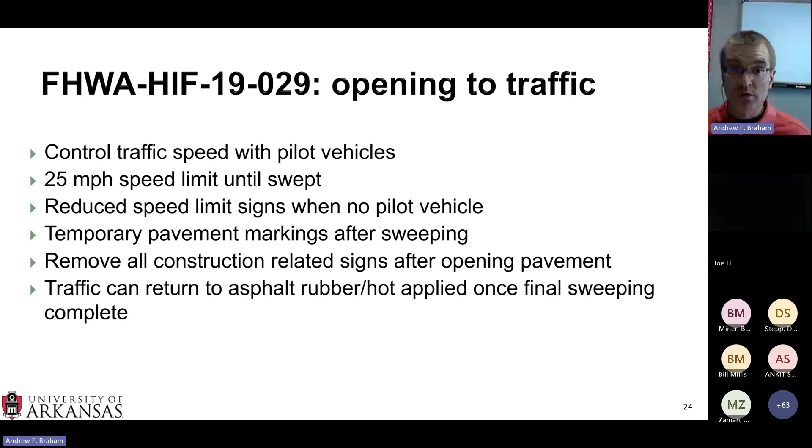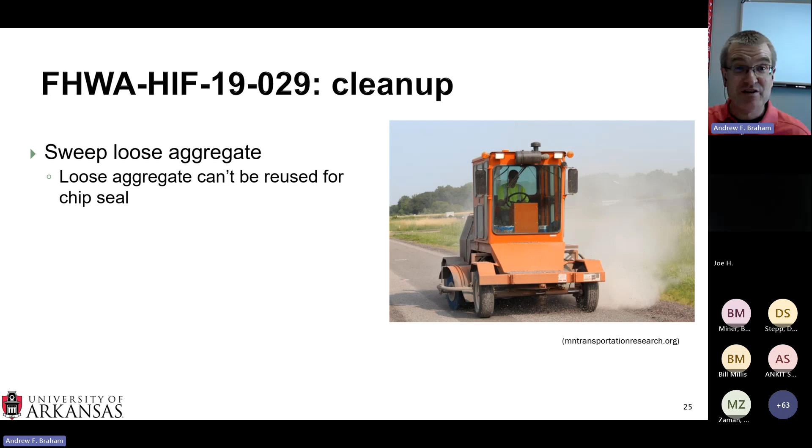Second to last section is the cleanup. You want to make sure you sweep your loose aggregate, and you don't want to reuse that aggregate. If you look on the side of the road in this picture, there's a little bit of excess aggregate there. You don't want to pick that up and reuse it because it's very dirty and has a lot of deleterious materials in it. That would be a very low quality chip seal material.

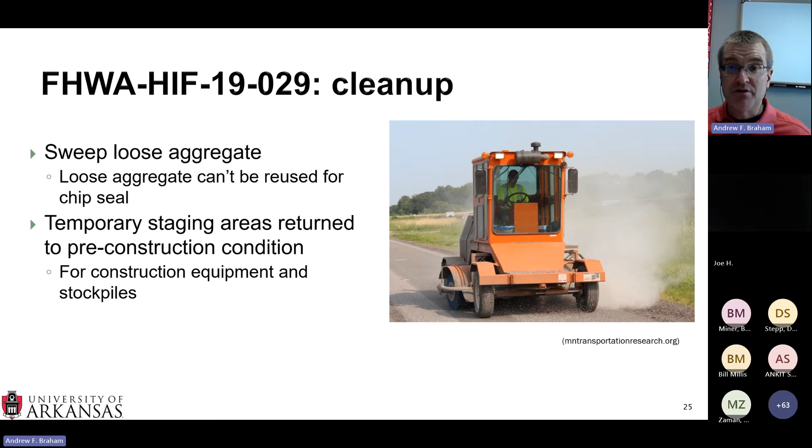Also, you want to make sure if you have any temporary staging areas where you put a stockpile or fill up your tanker trucks, those type of things, you want to make sure those are returned to the pre-construction condition. Then finally, they have a lot of great information in the bonus sections.

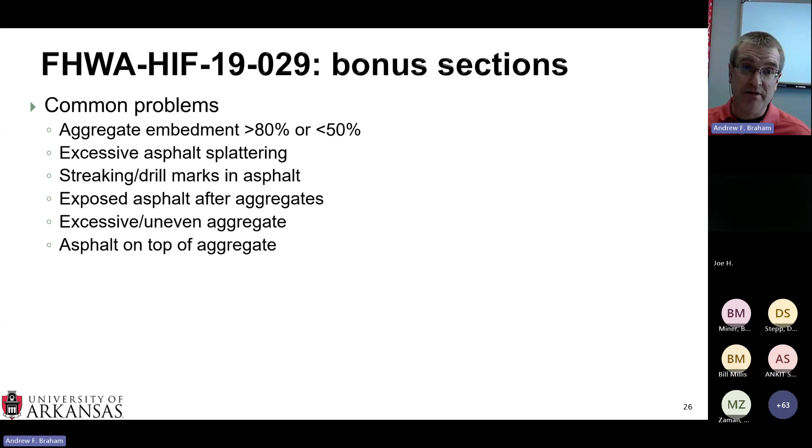They have common problems, from aggregates to asphalt splattering, to streaking or drill marks, to exposed asphalt, uneven aggregates, asphalt on top of aggregates -- that's no good, the asphalt's supposed to be on the bottom of the aggregates -- and then dislodged chips and bleeding and flushing.

So all of these have separate little sections within the FHWA checklist, and these are common problems. So if you're a new inspector, if you're standing at the side of the road and you see some dislodged chips, you can go to this checklist and say, hey, these are some of the things that we may need to look at.

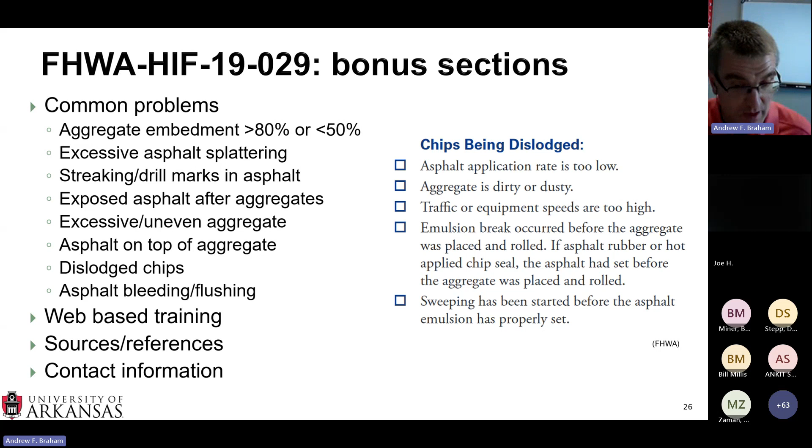And then finally, they also have links to web-based training, some specific sources and references, and then contact information if you want more. So I know I flew through that kind of quickly, but these are all the checklists, folks.

Now, there are some additional resources. There's a question about SAMI, stress absorbing membrane interlayers. The University of Arkansas has a series of webinars for pavements, called Pavinars. So if you just go to YouTube and search Pavinar, there's a whole slew of different resources there.

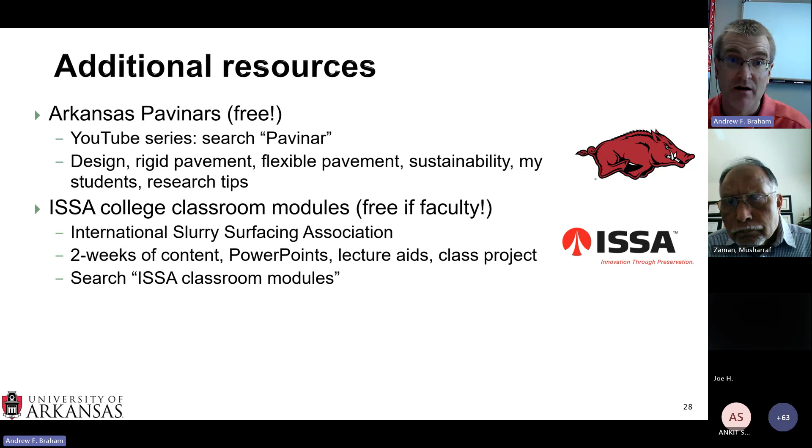If you are a college faculty member, or if you know a college faculty member, the International Slurry Surfacing Association has two weeks worth of content for classroom modules. So if you're teaching a class on pavement materials or pavement maintenance, definitely take a look at the resources here. If you have a .edu email address, you can get access to all of these resources free of charge, and you get the inspector manual for free.

And then finally, if you want to pay a little bit of money, the University of Arkansas does have four asphalt emulsion certificates: the introduction to asphalt emulsions, the application, the manufacturing, and the quality. I'm very biased, I think they're very nice, but if that's something you're interested in, feel free to check it out.

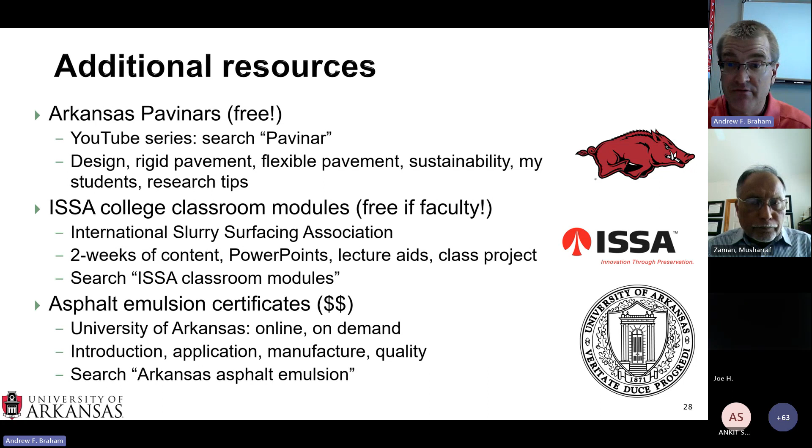Dr. Zaman, did you want me to start taking those, or do you have something to say before I get started? No, I think this is great. Thank you so much. Yeah, please go ahead and take those questions that are posted on the chat box.

Perfect. All right, the first question is: do you recommend coated chips to control dust?

This is where it's a little troubling to ask an academic a practical question, because my first default answer is: if you follow the design or the material standard for aggregates for chip seal, you should not have a dust problem. But I do know in reality a lot of chip seals are placed that are probably outside of those recommended specification ranges. So I would say that if you are on a project and you are having a problem with dust, to the point where you're either getting a significant amount of complaints, or the aggregates are not adhering to your asphalt emulsion or hot applied asphalt binder, I would recommend coated chips because that will help you overcome that excess dust problem. But in theory, you should have washed the chips so you wouldn't have excess dust, in theory.

There's a great comment here from Mr. Wilkinson, thank you for providing this. He said that having the chips delivered a few months before the chip seal always helps because it allows the charge to dissipate. I mentioned when aggregates are crushed, sometimes the charge builds up. If you let it sit for a little bit, that'll dissipate, and natural rain will help you rinse away the dust. So that's a little tip. If you have the flexibility to pre-crush your aggregate, you can reduce the reactivity and get rid of a little bit of dust. So thank you for that.